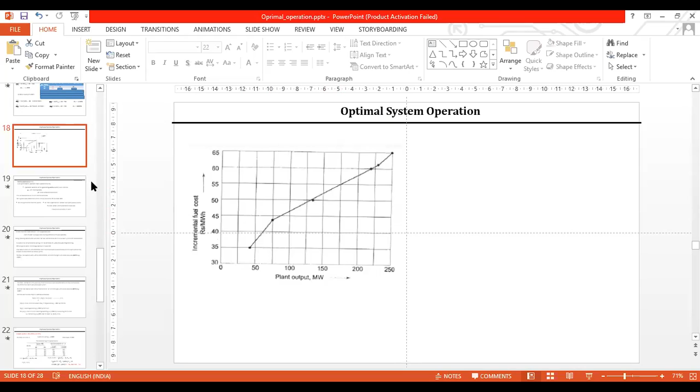So yesterday we were discussing the problem we had, and I think we completed that one with this plot. So now today let us take this example under optimal system operation, another topic that is unit commitment problem. Actually, this unit commitment problem should come before the economic operation or economic dispatch. Why? Because in the economic dispatch, you got two cost equations, that is two units or two plants characteristics, cost characteristic equation, C1, C2. So that means what?

Again, in these two, which one is better to operate for varying load? That is what we have done in economic operation. From where did you get these two cost equations? There may be so many units or plants available in a thermal station. Suppose if you take Raichur thermal station, we are having 7 units of almost 210 megawatts each and one unit of 250 megawatts. So 8 units are there in total.

So out of these 8 units, which unit to be operated for a particular load? Depending on the cost characteristics, the cost will vary for each unit. Like in the 8 units in Raichur thermal station, each unit's cost characteristics will be different. Because if you take the first two units that were installed in Raichur thermal station, the cost characteristics, that is cost in rupees per hour, is less, because at that time the power purchase agreement was different, so the cost was less. Later, the additional stages which came up had different power purchase agreement conditions, so the cost increased drastically, that is investment cost, maintenance cost, operating cost, etc.

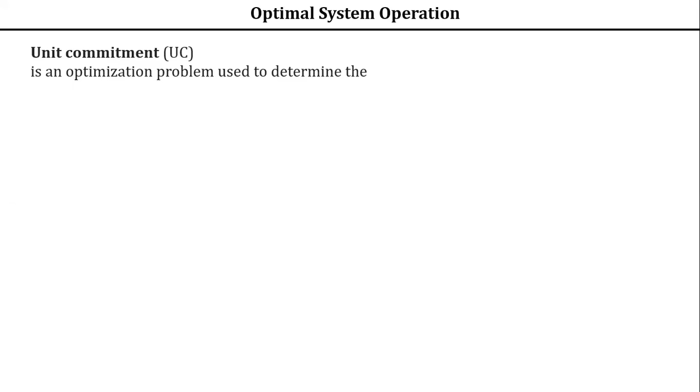Fine, okay. Now you see, unit commitment is an optimization problem used to determine what we are going to determine here. Let me take the pointer here. What we are going to determine is the operation schedule of generating units at every hour. That's what I have explained.

Each hour you have to find out the operation schedule of the generating units. Suppose 8 to 9, take Raichur thermal station only, 7 units, total 8 is there, I am taking only the 7 units, or 8 units you take it. Only the difference is the 8th unit is of 250 megawatt, first 7 units are of 210 megawatt. Total 8 units are there.

Now, what is the operation schedule of these 8 units? For each hour you have to determine, morning say 5 to 6 which generators should be on, 6 to 7 which generators should be on. Like that you have to determine. This is the unit commitment problem.

But however, with varying loads, you have to determine the operation schedule of generating units under different constraints. What are the different constraints? Constraints may be in the form of environment, or generator limits you have seen, or constraints may be in the form of voltages, etc. So many constraints will be there. So this unit commitment problem is used to determine the operation schedule of generating units at each hour with varying load under different constraints.

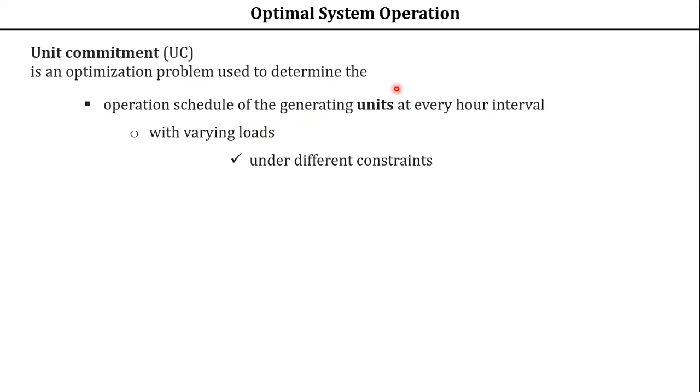This is the on-paper definition you have to give. Unit commitment will give you which units to be operated per hour for varying load with different constraints. This is what we are going to study under this unit commitment problem. In simple terms, it is an optimization problem of determining which units to be on for a given particular load under different conditions or constraints. This is your unit commitment problem.

Why do we have to solve this unit commitment problem? Why do we have to solve it?

Obviously, it is not economical to run all units at all times. Take RTPS, Raichur Thermal Power Station, as an example. It is not economical to run all 8 units at all times because the operating cost characteristics of all these units are different. So you have to find out which units to be kept on, and that has to be done on an hourly basis.

For a given load, determining which unit should be kept on is called the unit commitment problem. I have already explained this. For a particular load, these are the units to be on, the other units please don't operate. If you operate this way for a particular load, it will be economical looking into the cost characteristics, so we identify which units to be kept on.

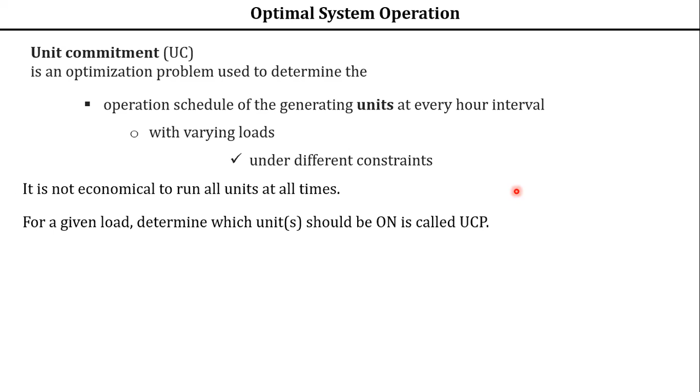Keep in mind RTPS, Raichur Thermal Power Station, consisting of 8 units. Out of these 8 units, which units we have to keep on for a given particular load, since it is not economical to run all the units at all times.

I have taken RTPS as an example, a thermal station, because unit commitment is important for thermal plants. It is very important because the load will be varying, and operating cost will be considered for thermal plants. In the previous class, when I started this optimal system operation chapter, I explained these things.

However, it is not important for hydro stations, that is hydroelectric power stations, because what is the fuel used? Water. Wherever the water is coming, it is free, apparently free, with almost no operating cost. So unit commitment problem is not important in hydro as well as nuclear power plants.

Why is unit commitment not important in nuclear power plants? Because nuclear power plants operate at base load. So your nuclear power plants will operate at base load, meaning there is no variation in load. Once a nuclear power plant is started with a particular load, it remains the same throughout. So there is no variation in the load.

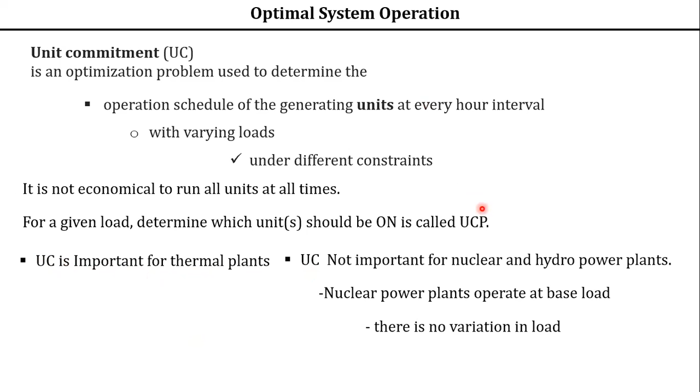In unit commitment problem, first the most efficient unit must be operated. Out of 8 units in Raichur thermal power station, which unit is most efficient? Most efficient means the efficiency should be high at minimum generating cost. Then only we call it the most efficient unit is operated first.

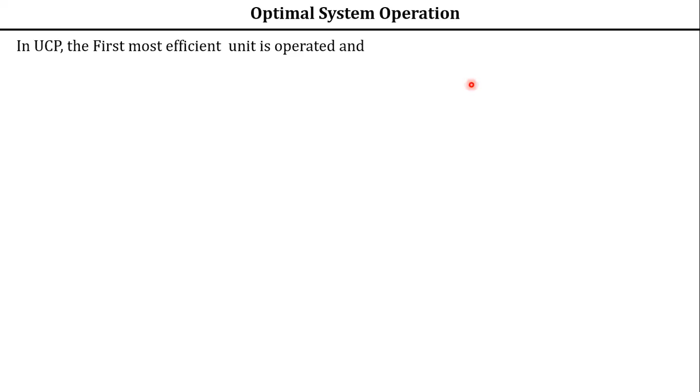Then as the load varies, the less and less efficient unit must be operated. So priority wise, you have to prioritize: first the most efficient one, then as the load varies, the less and less efficient unit must be operated.

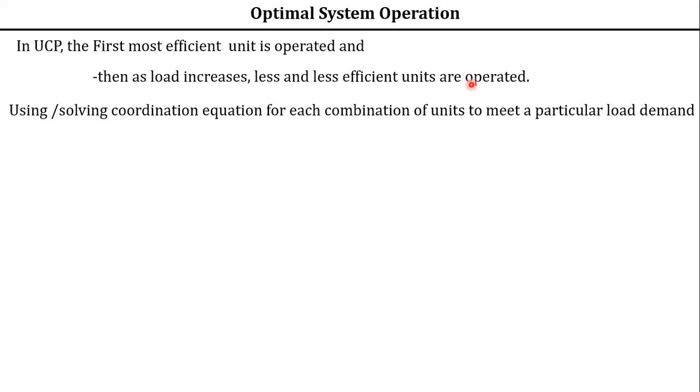Now, solving coordination equation for each combination of units: take the first unit and second unit, operate them, solve the coordination equation like our economic problem, or consider 3 units, 1, 2, 3. Solve the coordination equations to meet a particular load demand, and in turn find out which unit is to be operated at which load for economic operation.

Considerable computational savings can be achieved by using dynamic programming, as I said earlier. This dynamic programming is an optimization technique used to solve this unit commitment problem.

We use dynamic programming whenever a multi-stage decision is required. What is multi-stage here? Each hour you have to take a decision. Apart from this, whether you operate units 1 and 2, or 3 and 4, or 1,3,4, or 1,3,4,7, a combination of 4 units or 3 units or 2 units or 1 unit alone, this is a multi-stage decision. So whenever multi-stage decision has to be taken, you can apply dynamic programming.

Now you see the total number of units available. This is the data which is required before starting your unit commitment problem. What is the data required before the commencement of your UCP, unit commitment problem? Number of units available, then their individual cost characteristics.

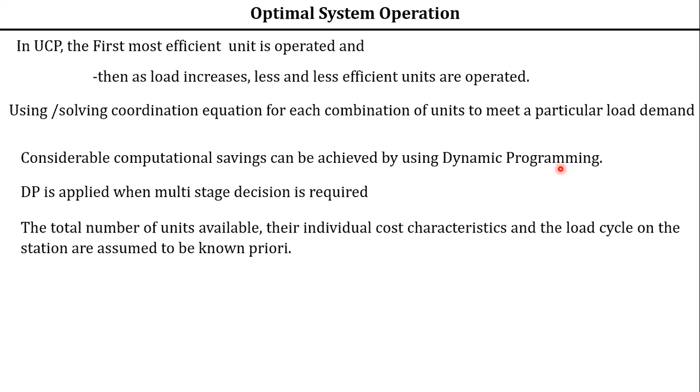So I said RTPS, number of units available is 8. What is the individual cost characteristics? First 2 units, which were installed long back, are having less cost in rupees per hour, that is, cost per generation is less compared to the other units. So it varies depending on that. Maintenance cost, operating cost, investment cost varies as years move on, so obviously the cost characteristics of the units will also vary. Therefore, individual cost characteristics is required.

And load cycle. 8 to 9 in the morning, this is a load. 9 to 10, this is a load. How to get this load cycle? By doing load forecasting, this is another term. By doing load forecasting means they will take the earlier history and decide, okay, during 8 to 9 this load is going to come, from 9 to 10 this load is going to come, 10 to 11 this load is going to come. So this is decided by performing load forecasting analysis. This is history based.

So all these three things: number of units available, their cost characteristics, and the load cycle on the stations, are to be known before solving this unit commitment problem. This is the first important thing you should know. Without this, we cannot solve it.

Now further, the load on each unit or combination of units changes with a small step size of delta megawatt. That means while doing this unit commitment problem using dynamic programming, every time you have to increment the load on each unit. This increment should be in a small step size, that is delta megawatt. For example, it may be a step size of 1 megawatt. Some stations or units may take 2 megawatts as a step size, or 3, 4 megawatts, or 0.5 megawatt. So this step size varies depending on the station.

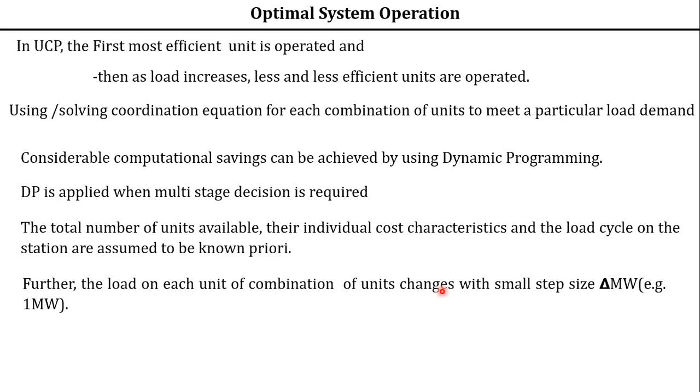And we will see how this dynamic program will be applied here. So again, I am repeating these two statements. To solve dynamic programming, you should assume these two statements and start: number of units, cost characteristics, load cycle on each station to be known or assumed, then the load on each combination of units must be incremented by a step size of delta megawatt, maybe 0.5 megawatt or 1 megawatt. That's why I repeated these two statements again in this slide.

Now let us see how this dynamic programming will be applied. In this dynamic programming, we are having a recursive relation. Using this recursive relation, we are going to solve this unit commitment problem using dynamic programming. Understood? So how to get this recursive relation? What is this one? Let us see here.

Let the cost function Fn(x) be defined as follows. Now remember, this is your cost function Fn(x). So what does this bracketed term x mean? It means the generation, x generation, in terms of megawatt. This is units, n indicates units. N is units, x is your generation in megawatt.

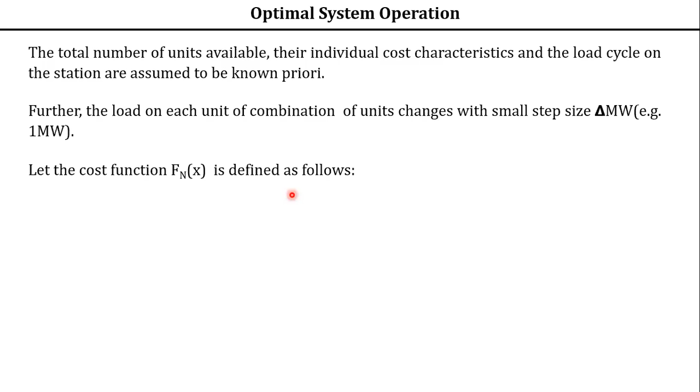So that means, to generate x megawatt by n units, what is the cost? That is Fn(x). To generate x megawatt by n units, what is the cost function? Fn(x), this is how you should read it. So this is defined as Fn(x) is equal to minimum of, you see this one, braces I am having, and this is one term I am having, and this is another term I am having.

Understood. Now what happens here? You see, this is one term, and this is another term we are having. So Fn(x) is equal to the minimum of these two terms. Minimum of these two terms we have to consider. So how to consider these two terms here? Let us see.

Fn-1(x-y), we are having it. Please remember this recursive relation. Fn(x) is equal to the minimum of these two terms: small fn(y) plus Fn-1(x-y). So among these combinations, which is the minimum value? Which one do you have to minimize?

The y variable, that means this y. So what is the difference between this capital Fn(x) and small fn(y)? The difference is here. Y is again your generation. What is this y corresponding to? Y corresponds to this delta megawatt, your step size delta megawatt. So what is the step size? We can assume it is 1 megawatt, isn't it? So this y may be 1 megawatt, 2 megawatt, 3, 4, etc.

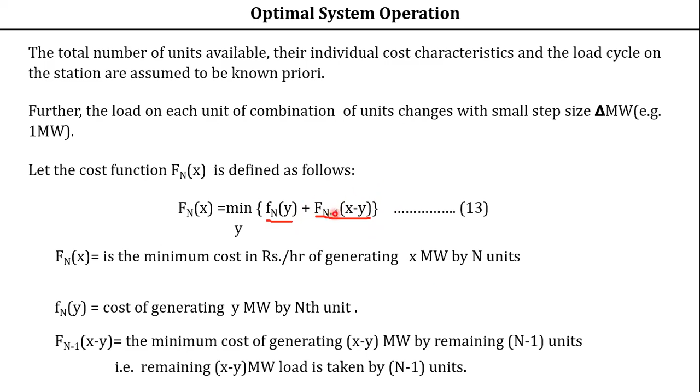So this is how you should write this one. Now you see, what is Fn minus 1? It is the minimum cost of generating X minus Y megawatt. Minimum cost of generation - capital F means you use minimum cost of generating X minus Y megawatt by N minus 1 generating units.

You see the same thing I have written. That means this will take the nth unit. There are n units. You assume the nth unit will take a load of Y megawatt. Remaining n minus 1 units will take the remaining load. That is the meaning, isn't it?

So hope you understood this recursive relation by using this one. So this is the recursive relation, you have to keep it in mind. However, we will not be doing more numerical problems, but for understanding the concept of dynamic programming, so let us understand this. Now you have understood dynamic programming. So this is how you have to explain it.

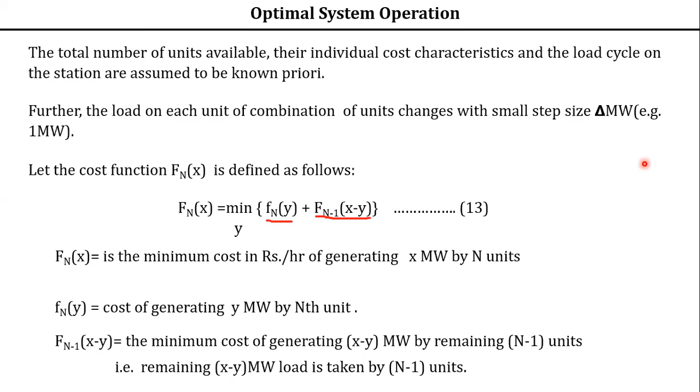Now let us take an illustration of this DP. How to illustrate this one? Okay.

So illustration of this one. Consider a sample system consisting of 4 units. Keep it in mind there are 4 units, because if I take an RTPS example, the number of combinations will be more - there are totally 8 units, each of 210 megawatts and the other one 250 megawatt. So let us take a simple example for understanding, that's why I'm taking number of units as 4.

Each unit rating is 12 megawatts. Rating of each unit is 12 megawatt and the total load is 9 megawatt, PD. This is your PD, understood? 4 units are there, each unit can take or generate up to 12 megawatt, and the total load is 9 megawatt. Now out of 4 units, which unit are you going to operate so that the operating cost will be minimum?

Which unit? So you may think out of 4 units, you may operate only the first unit, because each unit is 12 megawatt, so each unit can take a load of 9 megawatt easily since the maximum limit is 12 megawatt. So 9 megawatt load it will take - only the first unit you can switch on, remaining 3 units don't need to switch on since it will take this 9 megawatt load.

Or some of you will say, no sir, I don't want to switch on unit 1, I will switch on only unit 2. Somebody will say unit 3, somebody will say unit 4. Or somebody will say I will switch on a combination of any 2 - sir, I will switch on unit 1 and 2, no sir, I will switch on 1 and 4. So this combination will vary. Somebody will say I will not agree with 2 units, sir I will switch on 3 units at a time. And somebody will say no sir, I will switch on all 4 units.

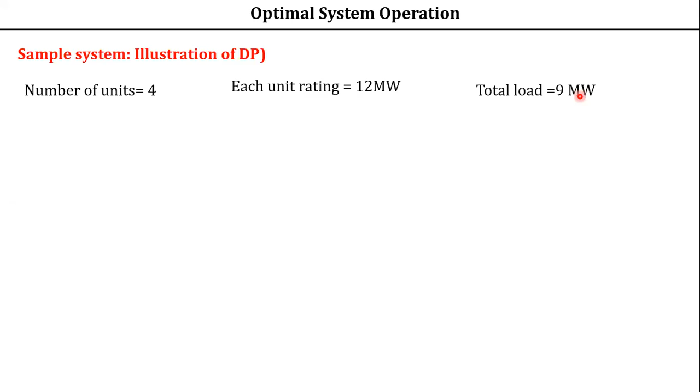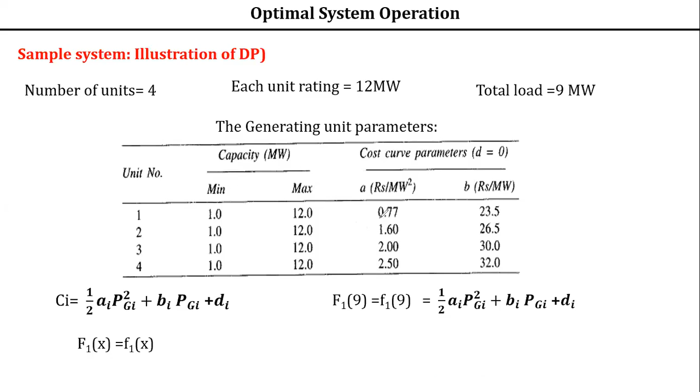This is the generation. Now in the same equation, you write Ai, Bi. That means this is the first unit. 1 indicates first unit. So for first unit, what are the coefficients here? The coefficient A is 0.77. What is B? 23.5. I is nothing but here, it is 1. So for first unit, what are A and B values, this is it.

What is D? It is 0 for all the things, that has been given here, so we will not consider this one. So substitute that A and B values from this table. Then what is this PGi? It is nothing but this PG, that is 9, that is nothing but your generation. X is your generation to meet the given load of 9 megawatt. So these values you have to substitute. Now let us substitute it.

This is the last line, is this one visible to you? Yes sir, it is visible. Okay fine, thank you. Because for me it is not visible. Okay, you can view it because that screen is coming in between.

Okay fine, so substitute this PGi as 9 megawatt here. So half 0.77 into 9 square plus 23.5 into 9. Okay, so that's how you have to substitute it. So the value will be rupees 242.685 per hour. Either way you can find it out.